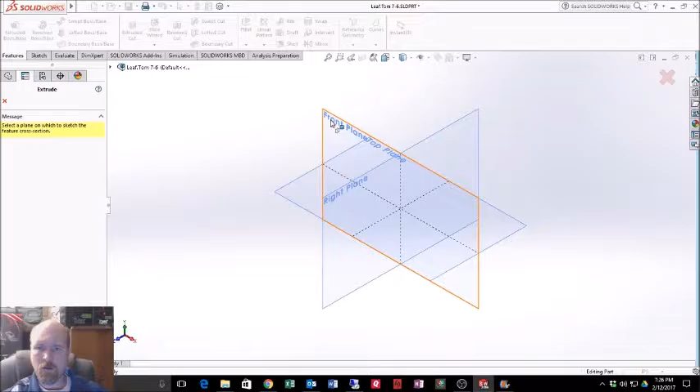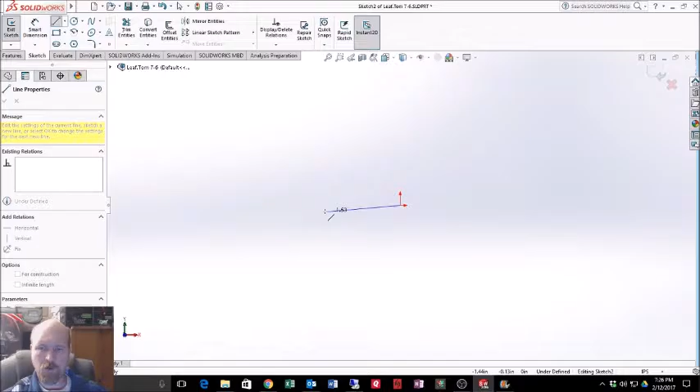I'm going to start with my base, and I'm going to choose the front plane for this part. Turn my planes off. The location of the origin on the part doesn't have a well-defined location, so I'm just going to start drawing from the origin and come this direction and rough sketch the profile of the part. Come down here, up a little bit, and finish up the profile.

Now from that, we have to add some relations. First one I'm going to add is these two lines. We want those to be parallel, that way it matches the rest of the part.

Now, these two lines, because the dimension in the book is the exact same, we can make those equal and minimize the number of dimensions that we need.

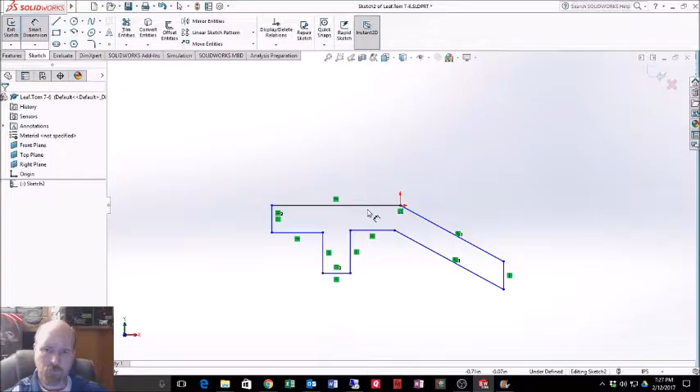So let's go ahead and start adding dimensions. We'll start like we did with the lines, and we'll start going around the part. So this one needs to be 2.25. From here to here, that is 0.5.

From this line to this line is 1.5. And actually, that line goes away, and we take this point and merge it with that point right there. Okay, good. We're set.

And then this distance here, from there to there, is 0.75. And then we already have this distance because we set this equal to this side.

Next, we want from the very top, comes down to this point, and they're dimensioning it over here, and that needs to be 1.5.

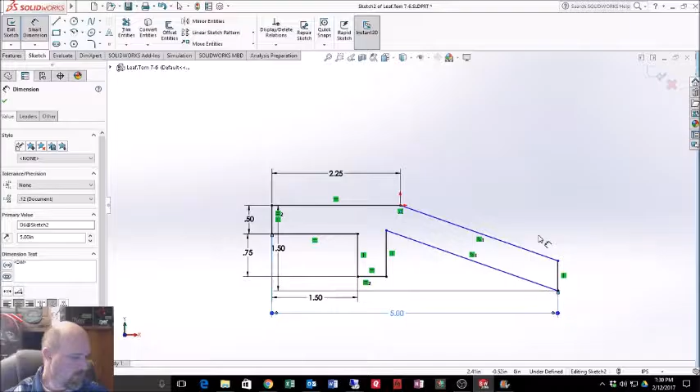Next, we need... what else do we need? Should be okay, but okay, so they're parallel. Oh yes, there's the dimension I need.

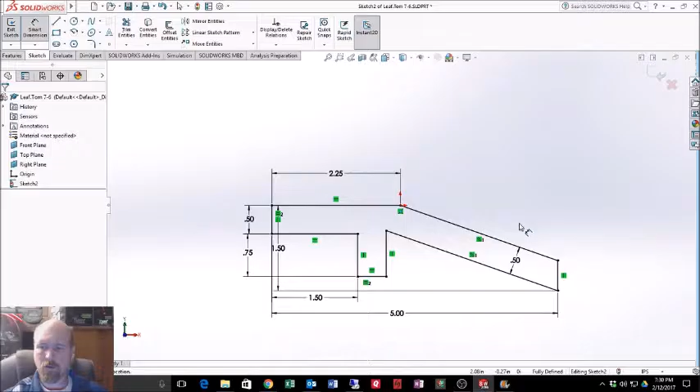I'm missing the dimension from here to here, which is also 0.5. There we go, and now I'm fully defined.

Just for practice, I'm pulling the dimension out, and I'm going to pull this out there as well, which is a good practice to get into because we can use these dimensions later on when we pull this part into a drawing.

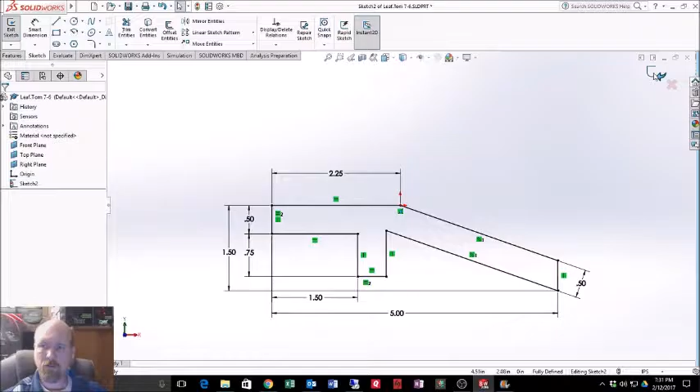Alright, so that completes this profile, so I can exit the sketch. I want to go mid-plane just because I like to have my part symmetrical about a plane, not because it has to be for this particular part.

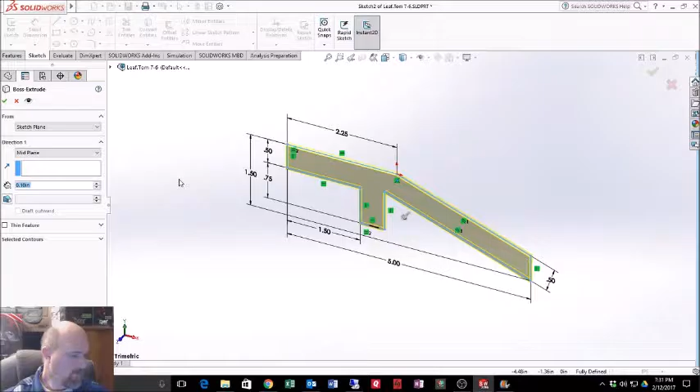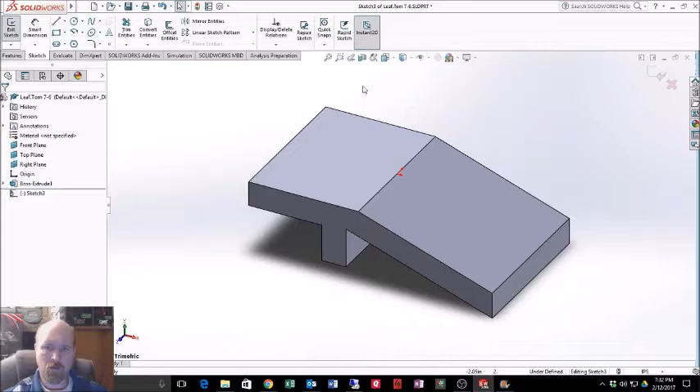And that distance would be 3 inches. I can click OK. And there we go. Now, I'm going to go ahead and put my holes up here in the top plane first. So I'm going to need an extruded cut. And then I'm going to right click and go normal to.

And then I'm going to place my circles. I'm going to make those equal to each other because they are equal circles in the book.

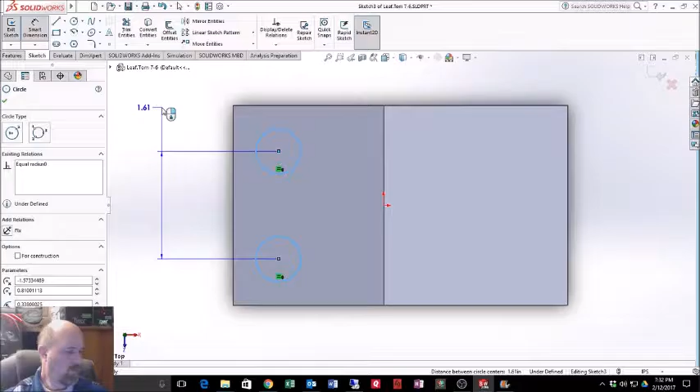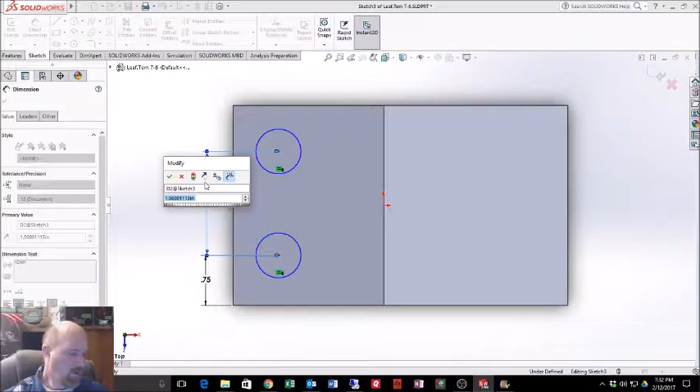Next, I'm going to place a dimension, from this edge to the center, and just basically mimic the dimensions that they give us in the book. And then I'm going to go from this point to this point, and that is 1.5.

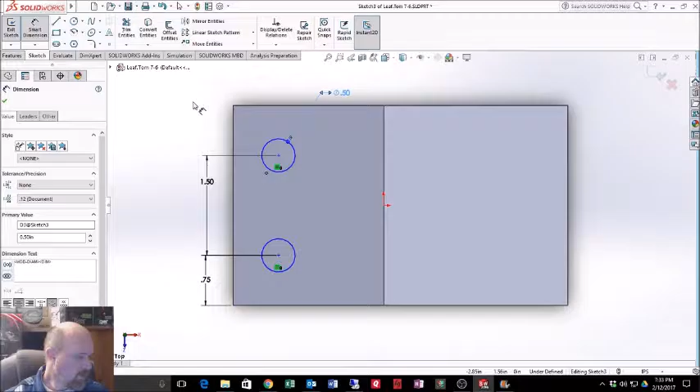And then I'm going to go ahead and dimension the size of these holes at 0.5. Then I need a dimension from this edge to the center, and that is 0.75.

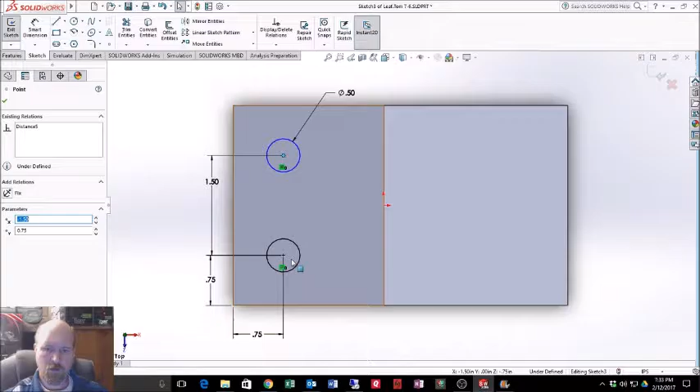Now, this one needs to be fully defined as well, but we want that to be in line with the other hole, so I'm just going to pick the center point and select the other center point and make those vertical to each other. And now we're ready to go because we were fully defined.

So now I'm going to exit the sketch, turn that isometric, and I want to just go through all instead of a blind however far.

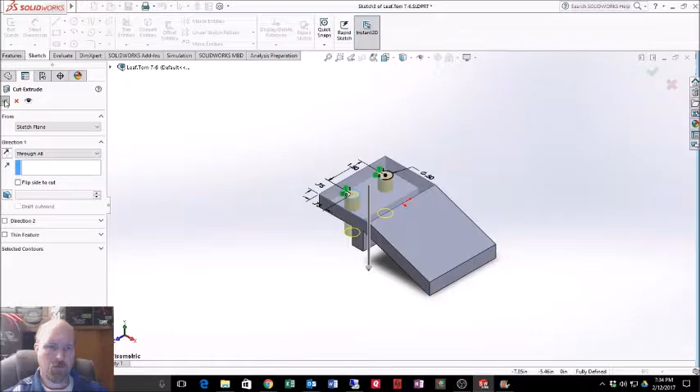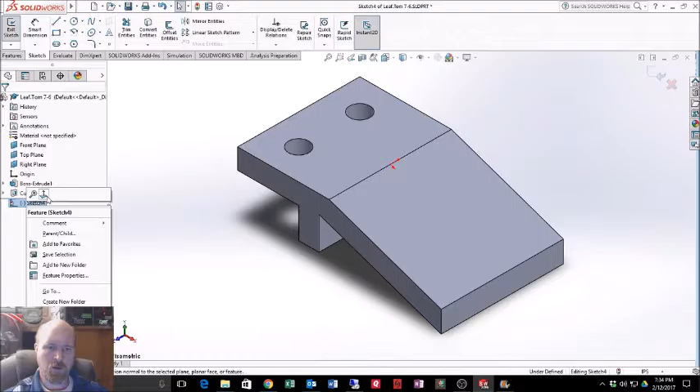And there we go. Okay, it just took a minute for SOLIDWORKS to catch up. Alright, so next I'm going to do an extruded cut in this surface, and again I'm going to turn that plane normal to, and now for this one I'm going to use a slot tool.

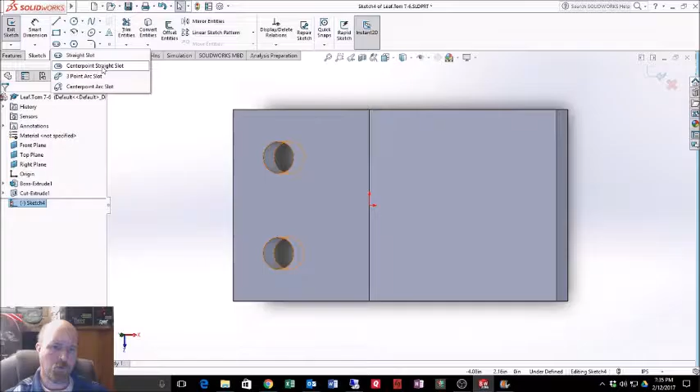Looking at the slot and the dimensions they give us, the standard straight slot makes the most sense because they give us the location of the two ending arcs. If they gave us the center point of the slot and one of the center end arcs, then we could use this one, but they didn't give us that. So I'm going to choose the straight slot.

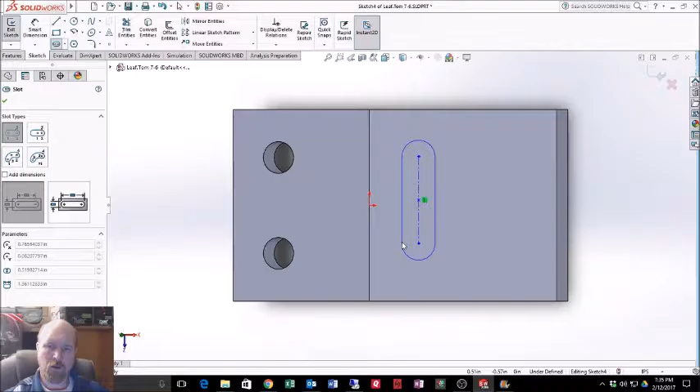And then I'm just going to pick a point, come down here a little ways in the direction of the slot that I want, pick a point, and next it wants me to pick how wide the slot is. I'm just going to pick, because we're going to put a dimension to determine all of that.

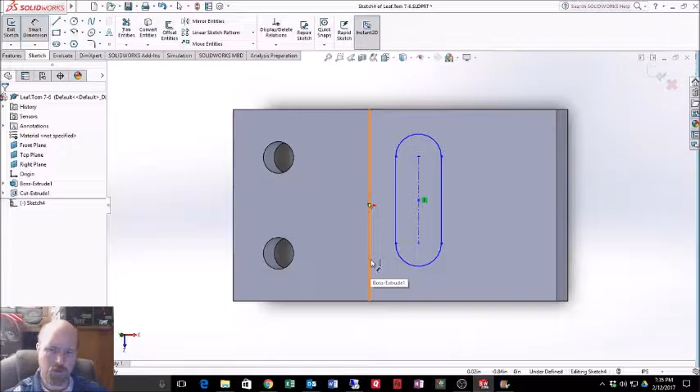So then I'm going to choose dimension, and the location of the slot is in relation to this edge here. So I'm going to pick that edge, I'm going to pick the center line, and that needs to be 0.75.

Now, the other horizontal dimension that I am given is the width of the slot, and that's 0.5. Next, from this edge to the ending arc center point, I'm going to drag that off my part there, and that is 0.75. Next, they give us the distance between the endpoints, or the center points of the arcs, and they give us that as 1.5.

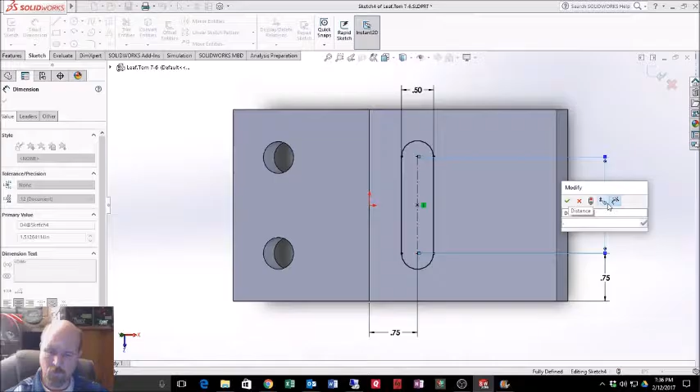Alright, now we have another slot that we can put right here, but this one's a little different. I am going to go ahead and choose the straight slot again, and choose a point here, and come this direction. I'm going to pass the edge of my part and just get me a horizontal slot like that.

Now, it doesn't like that relation, which is fine because we don't need that relation because we already got an assumed relation of this center point and this line that will center this arc on the part for us. And looking at the dimensions in the book, that is exactly what we want anyway, so I'm good. I'm going to drag these out just a little bit farther so they're not being covered up.

Next, I'm going to place a dimension to the center point, and that is referenced off of this edge, and they tell us that is 1.75. The other part they give us is the width of the slot, and they tell us that that is 1 inch.

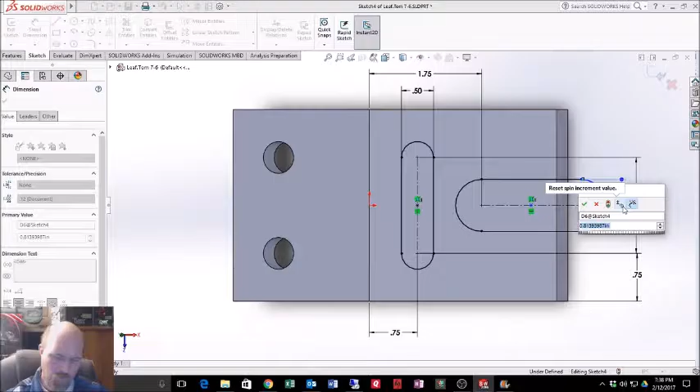There we go. Now the only thing left that we really need to do is fully define this and basically give us a point for this endpoint here. Now, a lot of people like to place that point on the top edge of this part, and this is why I like to look at the part normal to the surface, because if I place this point on this edge, yes, it'll make it fully defined, but if you notice, our arc starts here, and it's not going to fully cut straight all the way down the part.

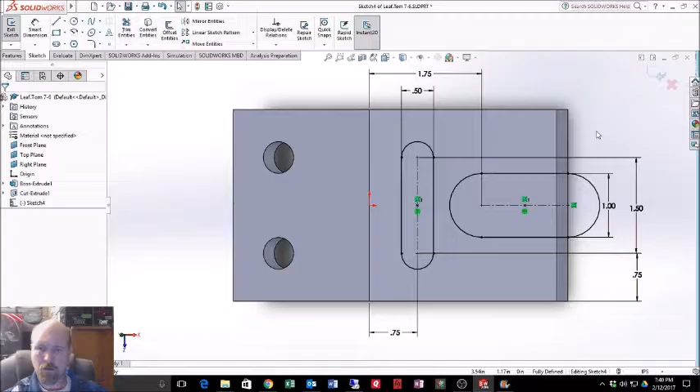Which is why we don't want to place it there, but we can place it coincident to the bottom edge of the part. Now we can clearly see that it's going to cut straight all the way to the edge of the part, and then this part we don't really care that it's going to cut space in an arc. And so now we have a fully defined sketch, and it's going to cut our part the way we want it to cut. So we can exit the sketch.

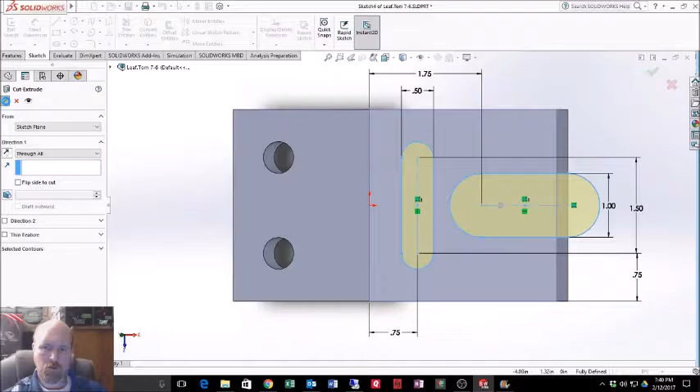And then we don't want blind, we want through all, and then click OK. There we go. And we can turn our part to look at it, and sure enough, it's nice and straight right there. Let's turn that isometric, and we're good.

So all I have left to do is hit save, and this part is ready for submission.